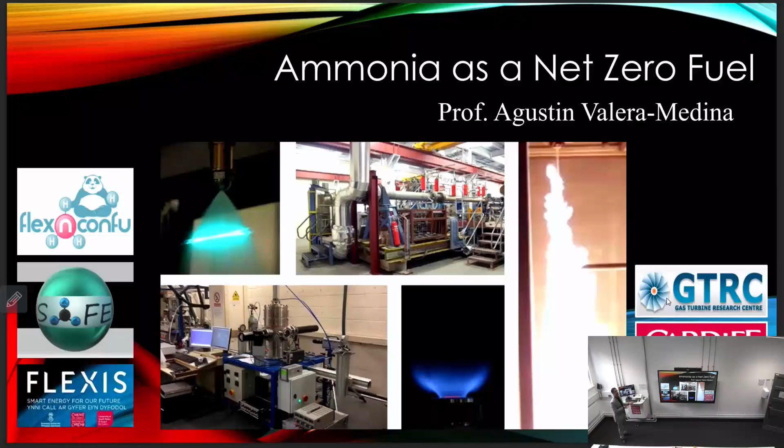So my presentation is going to be on ammonia as a net zero fuel. Probably you've seen some of these slides already, probably not. And the idea is to expand and disseminate a little bit of the work that we've been doing on ammonia and how this could be, as mentioned by Vicky, one of those net zero fuels that potentially can feed the future.

So as part of the presentation, I'll have an introduction, some of the challenges that we're facing when we're talking about the use of this chemical, developments that we have done in some areas of interest that have practical applications for the energy sector, collaborations that we've got, just a quick slide on that, and then final conclusions that we have found across all this research.

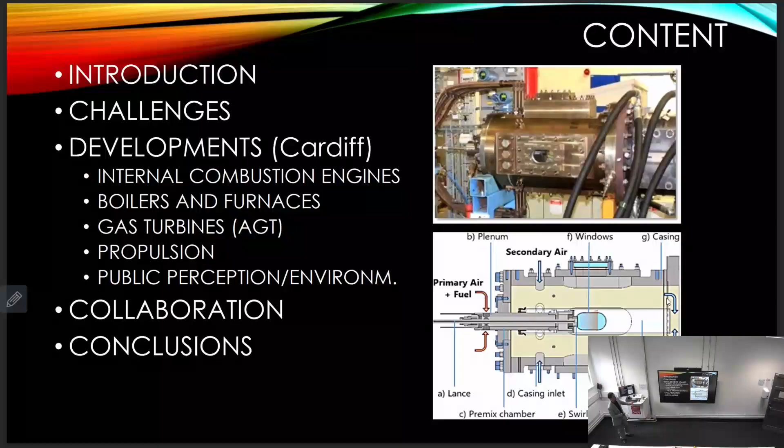So the introduction starts with this, we know it all: renewable energy that we can capture from different sources. So we've got wind that is well established, solar, and there's a lot of talk now about marine, with all the different components and systems that can allow us to recover all that massive amount of energy. What is always the problem is the intermittency that these sources face.

So we know that one day the wind is not good enough, and that can be enough to leave around 1 million people without any power. This is something that happened probably 6-7 years ago. You might remember it happened in the Midlands, where the news documented that around 40%, 50% of the UK or that region were actually running on wind power. And something happened in the North Sea wind farms, and things stopped, eventually reducing the power input into the grid. So that was a big problem.

Australia suffered a similar thing a few years ago. So this always shows that we have that intermittency factor that needs to be surpassed via other ways of storing energy. One could be batteries. We have talked about compressed gas. We have talked about many different sources. And one obviously is chemicals, chemical energy that we have learned to use for centuries, millennia, and that we're still using today.

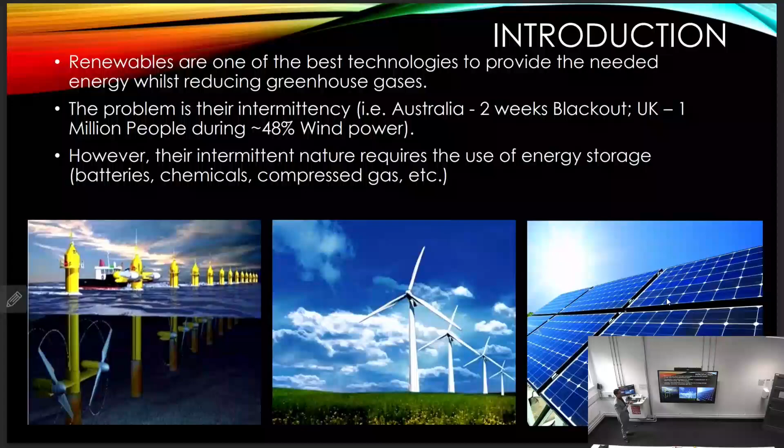It's probably going to then feed the future as we go along. So these are some of these different technologies that have been on the playground to then deliver some of that storage we're talking about. Batteries, obviously, capacitors, hydro and pumps, mechanical storage like compressed air, and some other different methods that now are in the scope of research and development for commercial applications. But one that always comes is chemicals.

So again, we have learned how to use them for over centuries. Methane, oil, coal, etc., all those kinds of chemicals that we know how to employ, and now these days talking about decarbonizing, bringing down the CO2 via net zero or low carbon vectors. And among those we have hydrogen and ammonia. That could be one of those ways as well to then deliver some of this hydrogen that is required worldwide.

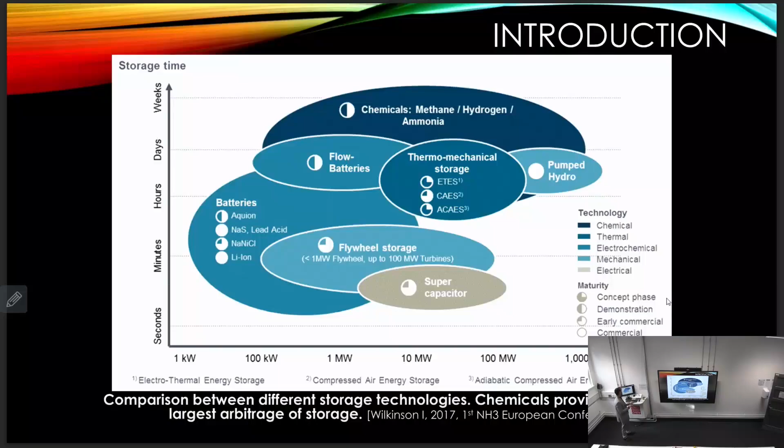This is a really nice and interesting map that I love to show in absolutely every presentation I deliver, because it's been written by the Hydrogen Council, and this goes back to probably 2.5, 3 years ago when they released it with all these different analyses looking into the different ways to distribute hydrogen. You can see here on the bottom that we have all these localized resources where natural gas is just located in very particular areas across the globe. Whereas in the case of renewable energies, photovoltaics, wind, we got absolutely every part of the planet that is essentially capable of producing some kind of renewable energy.

But the important part of the story comes when we do the analysis on the economics and the delivery of that hydrogen. So for them, the important aspect was how we're going to deliver or move around the hydrogen from, say, a location that is producing a lot of that renewable energy, for example Chile, and that being distributed to the US that is going to consume it a lot. A similar scenario would be Saudi Arabia or the Middle East going to the European Union, or, for example, Australia or New Zealand going to Japan.

So as part of that, they normalized the whole thing, did it in US dollars per kilogram hydrogen, and came up with 3 solutions to distribute that hydrogen. One ammonia, the other one liquid hydrogen, the other one liquid organic hydrogen carriers. And as you can see from the numbers, from the clean production that would happen in that heavy energy located zone to the final destination, cost at port, the numbers are similar between them. So 3.5, 4.4, 3.2, 3.8, 3.5, 4.

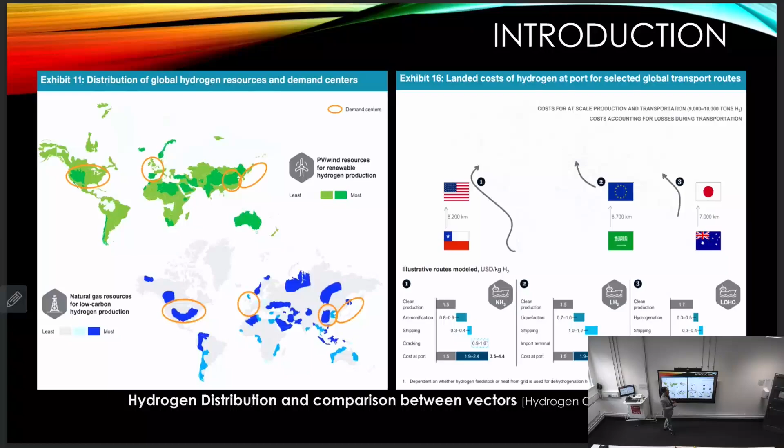Okay? But the interesting bit is that if you look into the part of ammonia, the cracking is taking around 1/3 of the total costs of the distribution of hydrogen. Meaning that if we can reduce or completely remove the cracking, this becomes the best solution, by a massive portion in the economics of distributing that hydrogen. So that's where all this research comes from, because ammonia can be used either fully as ammonia, or partially cracked into some components of hydrogen, and I'll show you some of the stuff that we've been doing along those lines, as a fuel.

And it's interesting because we can use it in that way to distribute for long distances, but it can also be used to recover stranded energy, waste streams. One of the things that is interesting as well is that because we have a molecule that we know how to use and have used for over 150 years, we can reduce the cost of actually storing and moving around that hydrogen. It's very simple. We have cylinders that contain liquid ammonia, slightly pressurized, and they can stand there for months, if not years, without major problem. Whereas in the case of hydrogen, as we start storing it for long periods of time, it becomes expensive, high pressure or cryogenic, which means sometimes 30, if not more times the cost that ammonia would cost us. It can be produced in islands or isolated locations.

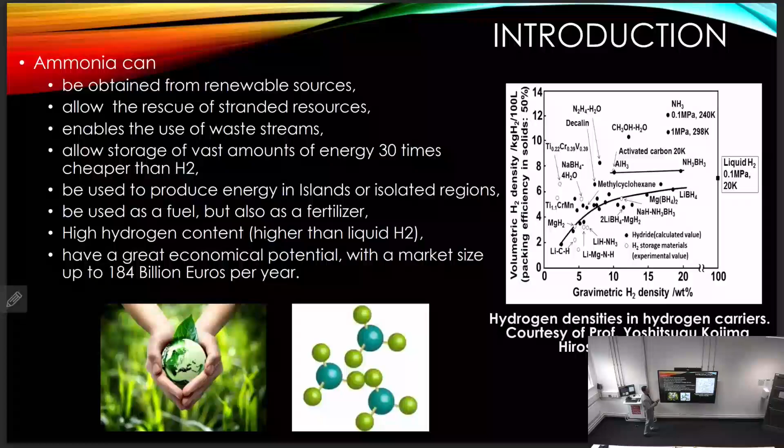It's obviously a fertilizer that we have used for that period of time, but now we're looking into it as a fuel, and it has more hydrogen than hydrogen itself. And I was like, what is going on? Well, it does, because we have in ammonia 3 atoms of hydrogen compared to 2 atoms in the hydrogen molecule. So it actually has around 27% more hydrogen than hydrogen itself. And then finally, we have a very well-developed, mature infrastructure that is moving around 200 billion euros per year just on ammonia. And that is going to expand 5 times just on the fertilizers.

So it's one of those cases that, again, just shows that there's potential. Now, one of the questions that I always get is, where are we going to get that ammonia from? We're talking about not only for fertilizing, but as a fueling vector. Well, right now we're producing around 90% of that ammonia via conventional methods, just methane reforming, lots of CO2. Actually, it accounts for around 3% of the CO2 globally.

Now, what companies producing ammonia are trying to do is move away from that and get into what is called Generation 2 ammonia production. Generation 2 ammonia uses electrolyzers fed by solar or wind systems that produce the electricity required to produce the hydrogen, which then gets mixed with the nitrogen sequestered from the atmosphere in these big reactors, Haber-Bosch systems. And that produces the ammonia that we can use for generation 2.

Problem is that they're still expensive. Electrolyzers are just too massive, and it's one of the big tolls. So ammonia produced this way is still very expensive, 3 times more expensive than the conventional way.

But then the third generation, the one that is promising, is getting rid of the Haber-Bosch process. This reactor that we have in between is going to be removed, and using fuel cells and materials that combine hydrogen and nitrogen at surface level will produce ammonia directly. So instead of having an electrolyzer producing that hydrogen, which is the expensive part of producing the ammonia, it will be only water and nitrogen that combined together will produce ammonia straight away.

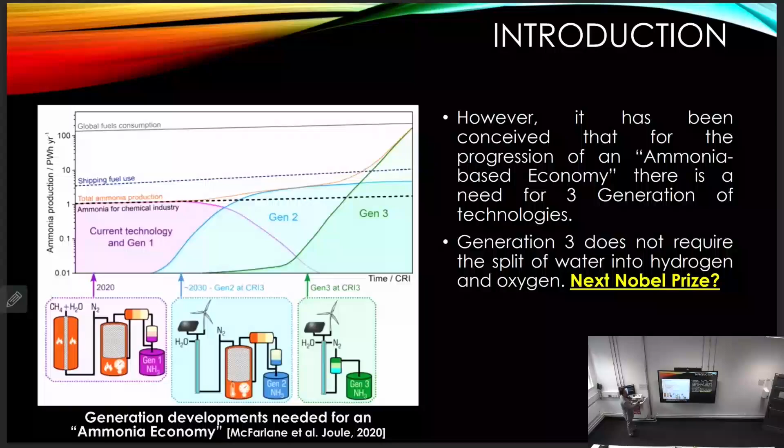Ammonia is going to be a support to that hydrogen agenda. It's not going to be the silver bullet. It will have some niche applications, and I'll mention those. And finally, if we want to store it for a long period of time, ship it, or distribute it over long distances, we go for ammonia. So it can support all these different aspects: transport, heating, cooling processes, propulsion, stationary power, etc.

Now, there are many things that we still don't know, and some of them have to do with fundamentals, reaction and combustion. Those are what we are studying here in engineering, because the reaction of nitrogen is very complex. Once we start burning it, we know some cases and conditions where we can bring down NOx emissions. But the reaction mechanism modeling that exists at the moment hasn't cracked what is going on at different pressures, conditions, flow rates, etc. That is still unresolved, in an area that has been around for probably 60 years.

So, a fascinating area. Public perception is probably going to be the most important topic in the development of these technologies, because communities perceive ammonia as a toxic chemical and its smell as a nuisance. So public perception differs in different areas. For example, in the countryside they are used to some ammonia smell, 1-2 parts per million from the manure coming from cattle, poultry, etc. Whereas in cities, they say, no way, this is not going anywhere close to me.

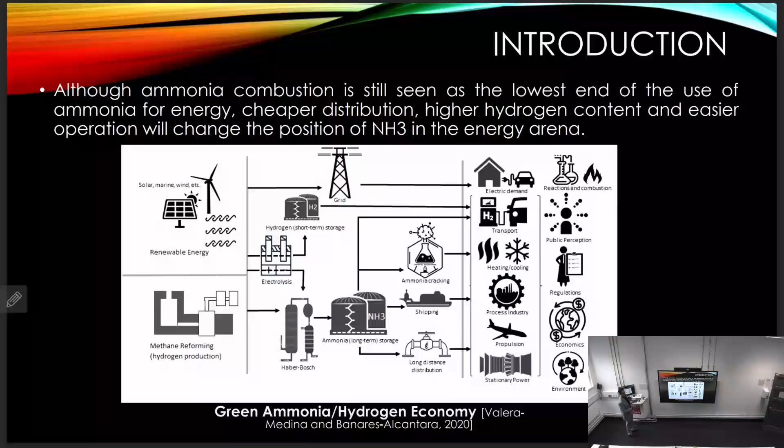So we've got ammonia that is being produced in Morocco and then consumed in the UK. How is that going to impact the nitrogen cycle? We don't know. So along those lines, ammonia presents a really nice energy density, higher than the one that we get with hydrogen, even liquid or pressurized. Compared to lithium batteries as well, it's much higher. It's not as high as the carbon-based fuels, but in some cases, for example methanol, it's close enough.

And when it comes to the long distribution cases, shipping, rail or lorries, we have as well the case that ammonia is the most cost effective. So again, there are some areas where ammonia will play its role. So it's very likely that we'll see it in shipping. The shipping industry is nowadays developing internal combustion engines, large size, again, 2-stroke, that are putting this together.

The latest news was just a week ago that MAN has finally finished, with the support from several South Korean and Japanese manufacturers, the first unit that will be put on the sea in the next month. And with that, they want to replace many others as part of their commitment to reduction of emissions in the various Asian countries.

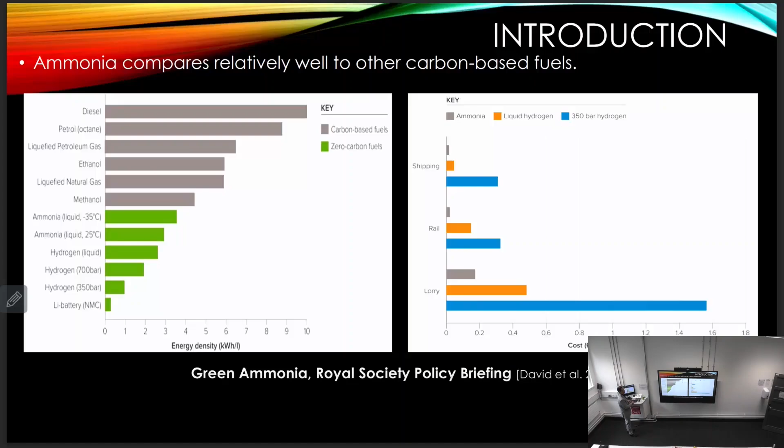Rail as well, heavy duty, large, long distances will be another area that has a lot of potential. Because again, the requirement of ammonia that you need to drive or move a train will be lower than the amount of liquid hydrogen that you would need to do that same trip. And then finally, lorries that would require heavy loads in combustion base. So when it comes to combustion, the heavy duty just plays better than the fuel cells.

A little bit of wearing from the cylinders, but nothing major, nothing that you would say is going to stop us operating. And the same way, we have the other cases, and then as carbon-free fuel comes, this is an option that is feasible.

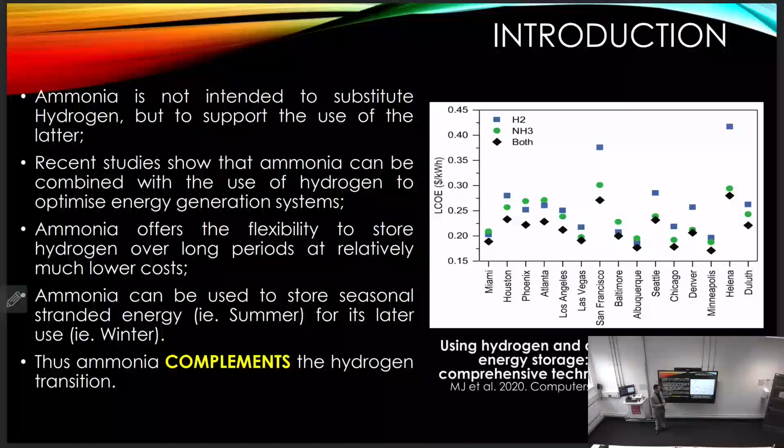And then finally, showing that the combination of both of them could complement each other: hydrogen is something that can be used straight away, can be employed for fuel cells, for civil transport or use in cities, whereas ammonia could be the seasonal storage, long distance transportation, or used for heavy duty in farming locations.

So it's got a lot of capabilities, and that's the reason why the International Energy Agency in 2018 finally gave it a ranking of being a fuel. Before then, if you look into 2017, there's nothing about ammonia. It's just like an explosive or a chemical, and it's not until 2018 that this diagram appears with power industry and shipping.

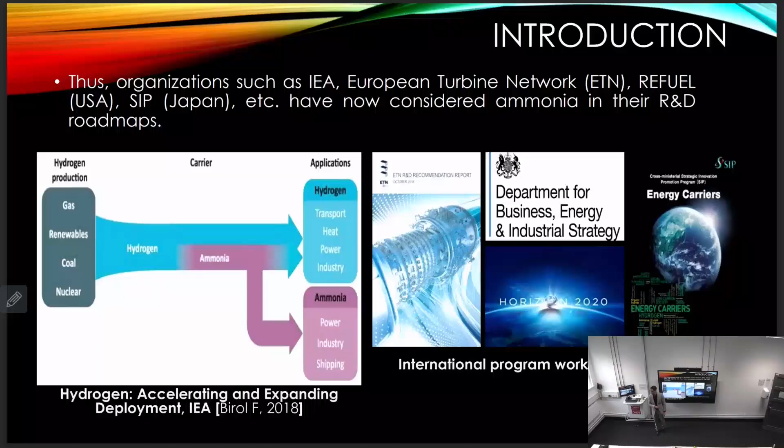And with that, many agencies across the world, especially in Japan, China, and South Korea these years, have been taking over the use of ammonia. Singapore is another very strong one, and is now looking into decarbonizing the port using a combination of both hydrogen and ammonia.

Whereas in the cases of internal combustion engines, gas turbine cycles, furnaces and boilers, we already have cases that are industrial. For internal combustion engines, we have the marine sector. In the case of gas turbines, we have Japan leading some facilities that are demonstrating as we speak, 2 megawatts, 3 megawatts power. And the most interesting at the moment is furnaces and boilers, because furnaces are now showing efficiencies between 85-90%, and we're talking about gigawatts of power.

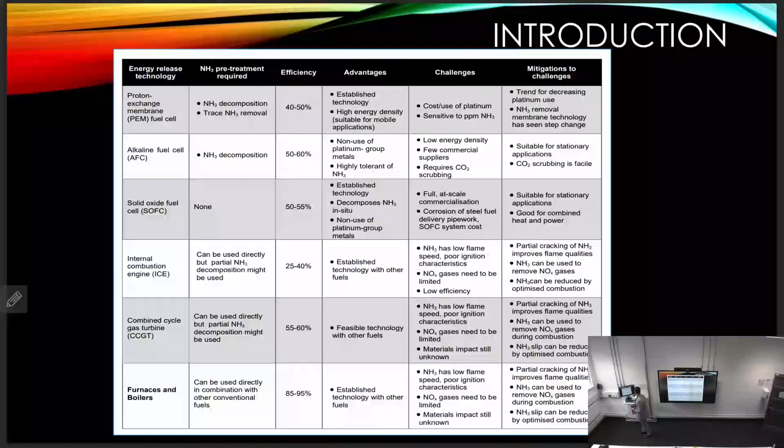So the latest developments are conducted by a company called IHI. They are in collaboration with some energy and electricity producers in Japan that are now changing up to 50% coal for ammonia. So it's co-firing ammonia and coal, and they're now using 50% ammonia. The amount of ammonia that they're employing is in the range of 500,000 tons per year just to do so.

Now, as part of the challenges, we have identified 4. First, we need carbon-free synthesis, cost reduction and efficiency. As I mentioned, the problem is that generation 2 ammonia is still too expensive, and generation 3 hasn't arrived yet. If it arrives, we never know. Power generation at utility scale needs to be stable and with low emissions. As I mentioned, we have NOx emissions produced as part of the combustion of ammonia. We are now targeting that. That's the name of the game at the moment.

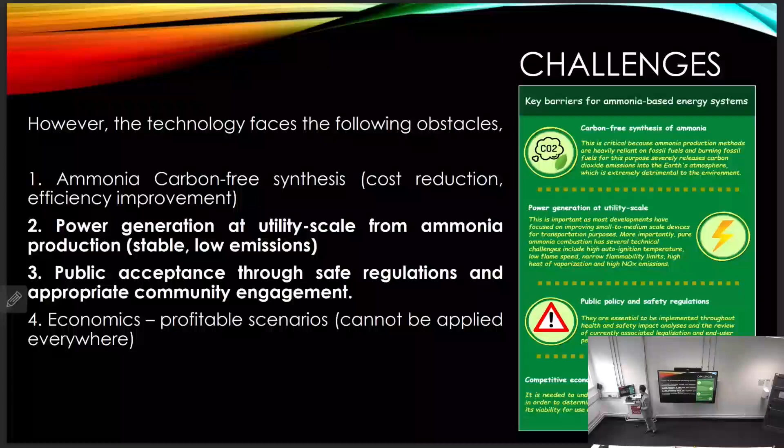Public acceptance with safe regulations, because we don't have regulations yet, and public acceptance considers ammonia as too toxic or too dangerous, and finally the economics, which need to be profitable. These are the 4 challenges that we need to surpass before we get ammonia running.

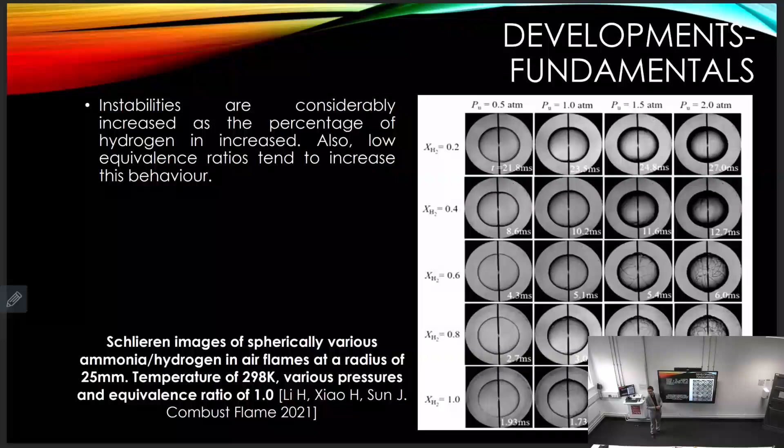So cases where we have barely any hydrogen, 20% up to 40%, are actually stable. They allow us to play well. But once we have passed that point, the hydrogen takes over, and it becomes extremely unstable. So what would be the best blend to use in these systems that allows the ammonia to be burned, but combined with hydrogen that we can obtain from the same ammonia to stabilize the flame? That is some of the research we've been doing. These are the kind of flames you will see, and it shows how different they are.

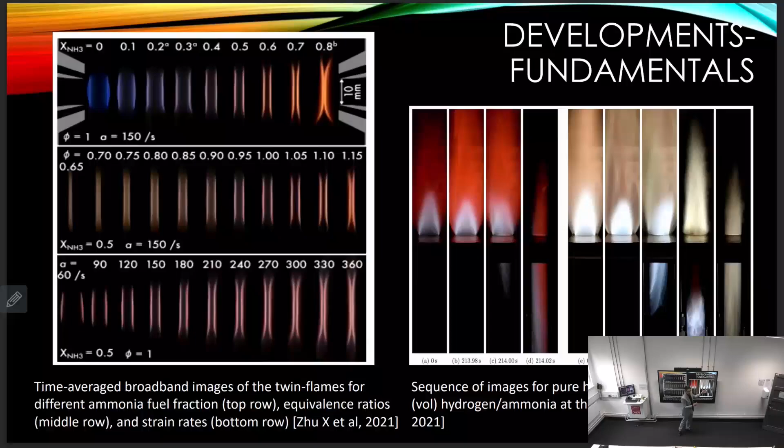This is a case where we have natural gas, again, a nice blue flame like the ones that we've got in stoves, and this one, an orange flame that is purely ammonia. So it's just the changes in radical formation in chemistry that are happening with, again, combinations of the stability of the flame, one that is hydrogen that is very fast moving into our system, flashing back, whereas the other one is just taking its time, much longer to do so. But at the same time, it's more prone to be blown off.

So this is some of the research that has been going on that has to do with liquid injection. Most of the developments at the moment have been relying on vapor ammonia because it's simple. We can use waste heat to produce the vapor and in that way improve the combustion. But one of the ideas and best ways to use ammonia in, for example, internal combustion engines, is to spray it into the cylinder, similar to diesel or gasoline or anything that is liquid. That way we can improve the process overall.

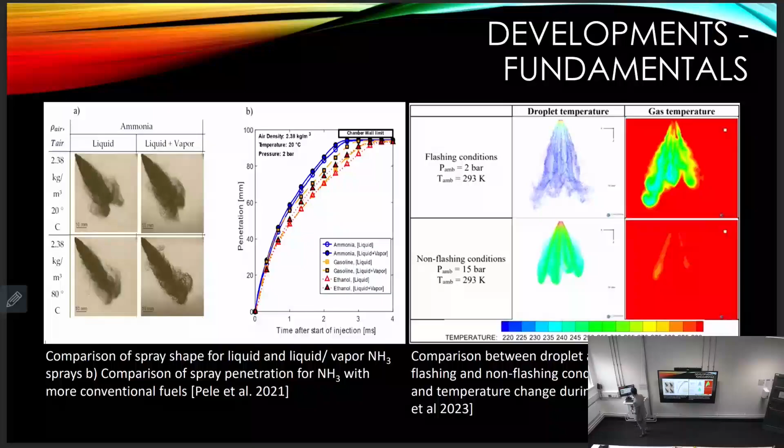And that is an area that is really interesting because ammonia, as it gets hot, will start flashing and vaporizing and producing different patterns that are difficult to determine. Similarly, once we start pressurizing it, things change, and these curves, penetration and how we get the fuel in, just start changing. So again, lots of things to be learned. This is an area that has probably only been showing up in the literature for 2.5 years, but it's still growing with modeling and implementations.

This is a layout done by the AIST Institute, one of the research institutes in Japan that has been leading this ammonia agenda. And you can see that eventually they had an evaporator that would feed combustors, and now they're looking into the use of liquid ammonia to directly feed into these systems.

Now, with that comes a lot of challenges, and things that we're trying to learn, on how we will produce onboard ammonia. It will produce NOx emissions. That is the main emission produced when we are burning the ammonia molecule, because it's got nitrogen in it, and then we need to reduce that in a way that is not polluting. If we get to a point of producing a lot of N2O, N2O is 300 times worse than CO2 in terms of climate change. The global warming potential is 300 times larger, and that means that just some parts per million of N2O would be enough to throw out the window the reduction of CO2. That's why this is a major challenge, especially when it comes to these liquid injection systems.

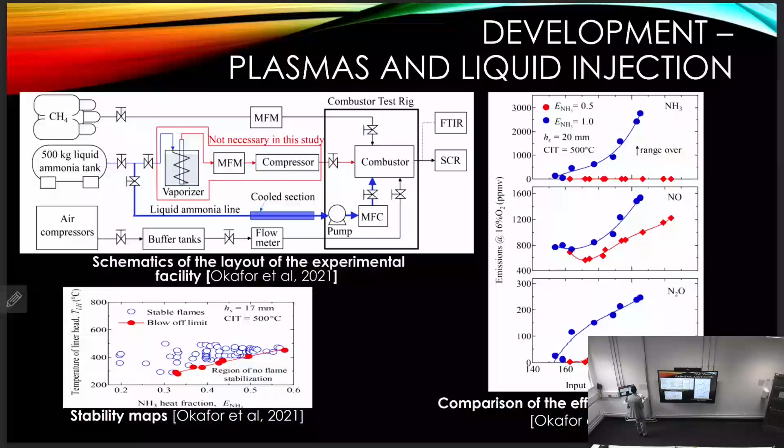Another interesting area that just blows up the imagination is the use of plasmas. Plasmas that have been used for ignition or for other purposes in physics are now also on the target to use ammonia in an efficient way. So what is the process? We have a very intensive energy field produced by these plasmas that will start producing radicals that can start interacting before they get oxidized. That means that we can potentially bring down the emissions and also improve the flame as it is. So, laws of physics.

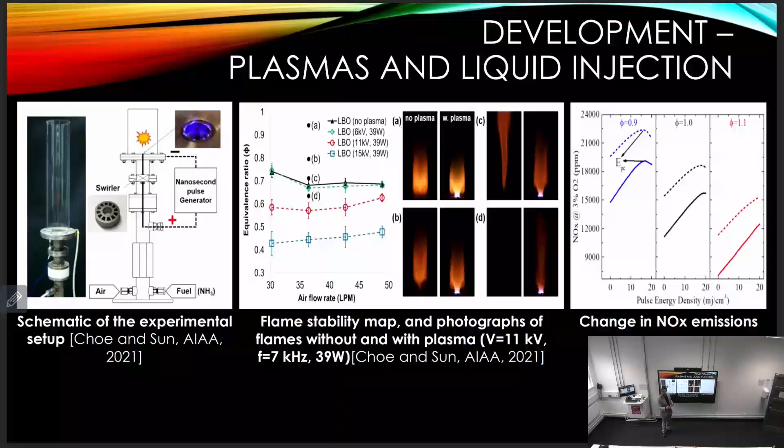For example, I read for the first time a paper that had to do with magnetic fields: how magnetic fields are trying to change the ammonia flame, and by making it more concave, increase its stability and reduce emissions. So things like that are what people are trying, using more creativity and combining different fields.

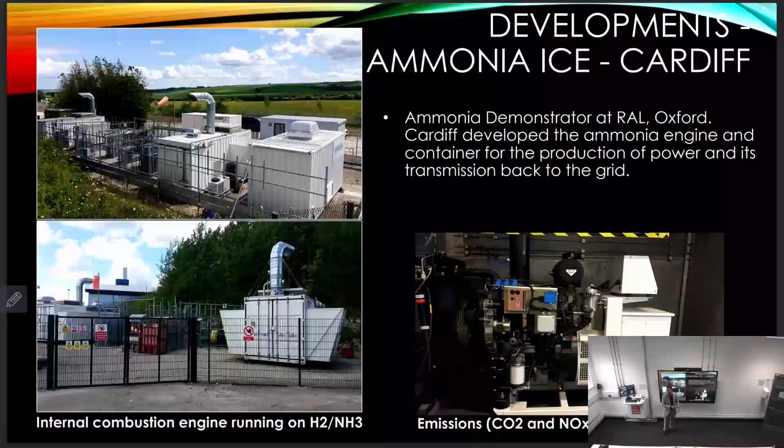Some of the work that we have done in internal combustion engines has to do with a unit that we got at STFC, next to Oxford. This was a very interesting project because we had a wind turbine operating around here, an air separation unit in this container developed by Siemens, then an ammonia producing device designed by Oxford, a storage facility, and finally a container with an engine that we developed. With that, we demonstrated the whole process of capturing wind energy, passing it through all the processes, and finally generating energy back into the grid. So that's how we started with internal combustion engines, and with that, we have looked into some of the work that is going on.

So with that, in the cases of transportation in Korea, they have taken a lot of work in the same way that Japan, and now things are happening in Canada with fuel cells. In the shipping world it is more concise. There are more things going on at larger scale. We're talking about 2-stroke large engines, and they are now promised to be in commercial applications by 2025. So we're not that far away. We're just a year away from getting to that point.

And then finally, for farming, because again, being a fertilizer, it could be one of those cases of receiving the ammonia, and then once we've got it, depending on the season, use it as a fertilizer or as a fuel. That's one of the concepts that, for example, in the US they are looking at, because they have a pipeline that feeds directly into gas stations. So these gas stations receive the ammonia directly. Farmers pump the ammonia into their nurse tanks, and then once they've got it, they use it to plough the field, which is something that's really interesting.

But in the same way, they could use it and plug into the truck, and that way feed it to use it and move it. So it can be used again without any problem, alternating between a fuel or a fertilizer.

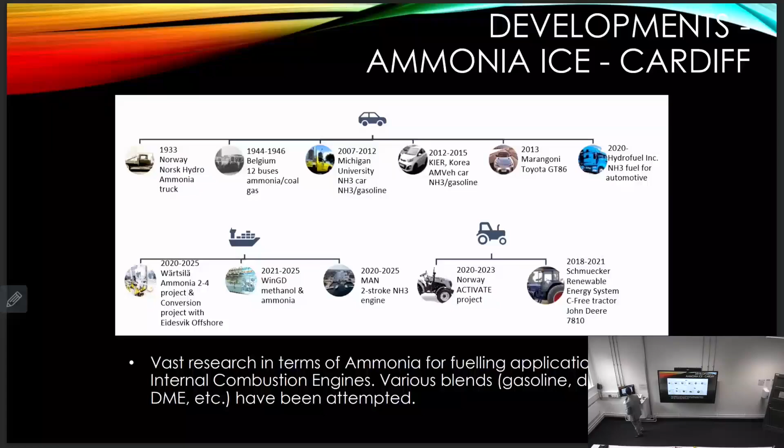As part of this program, some of the studies that we have done have to do with using the ammonia for shipping and long distance or large distribution, and with that a concept of a city gate terminal, similar to what we have with high voltage electrics, would allow the ammonia to be received, and from that point either crack it and produce hydrogen for the cities, or use it as ammonia in rural locations, where, as I mentioned, it can be used for heavy-duty trucks, stationary backup power, heat, cooling, or even stationary large power generation.

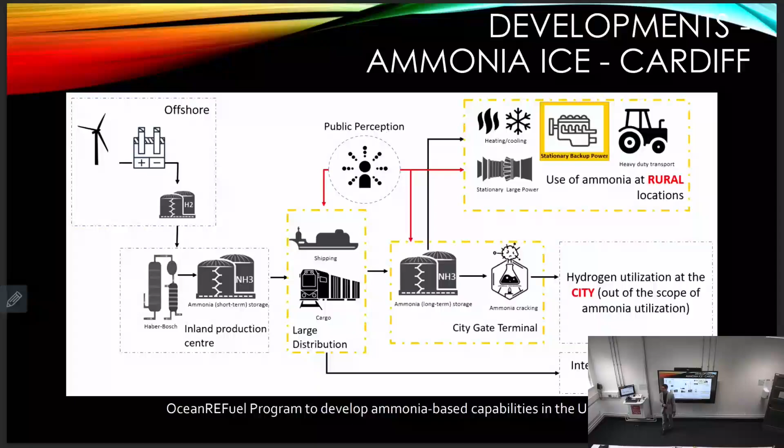Because again, most of these large power generation systems do have ammonia facilities for deNOxing. So they know already how to handle the ammonia. So it's not an unknown for them, it's something that is a given. So if they can replace it, this would be a way forward to decarbonize relatively easily.

These are some of the cases when it comes to internal combustion engines, with all the complexities that we have to sort out when we start mixing with the different vectors. So we have natural gas, syngases, gasoline, DME, diesel, etc. And as you can see from this table, we have cases where, with onboard ammonia, the NOx increases or decreases. We have hydrogen that sometimes shows up, hydrocarbons as well in the same scenario. So this just shows how complex the scenario is.

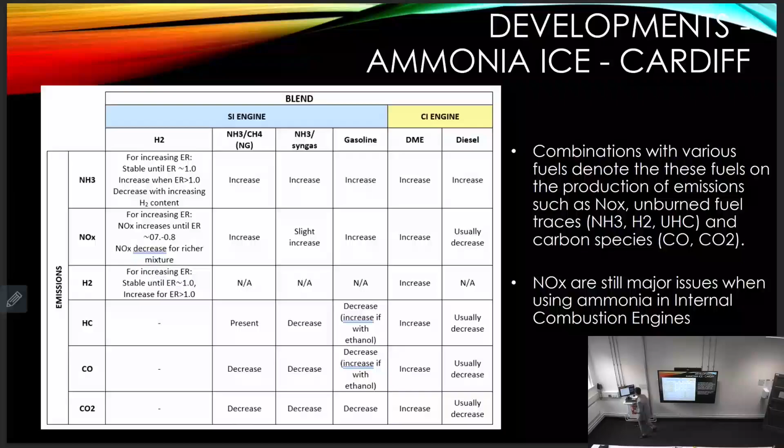And many companies, many institutions working together with industrial ventures are looking into very specific cases to try and decarbonize some of these using ammonia. Again, the challenge is that they are so variant, so different, that once the ammonia starts mixing with some other molecule, it starts producing very different patterns. So that's where the research is. And again, this gives us a lot of opportunities to do a lot of work in the institutions.

Fluidized beds, the same way that we have for biomass, can be employed for ammonia as well. And these are works done by South Korea, where they're looking into the use of these types of systems to better produce energy and use some of the waste that they're already producing in locations, again, like farms where they have some ammonia available.

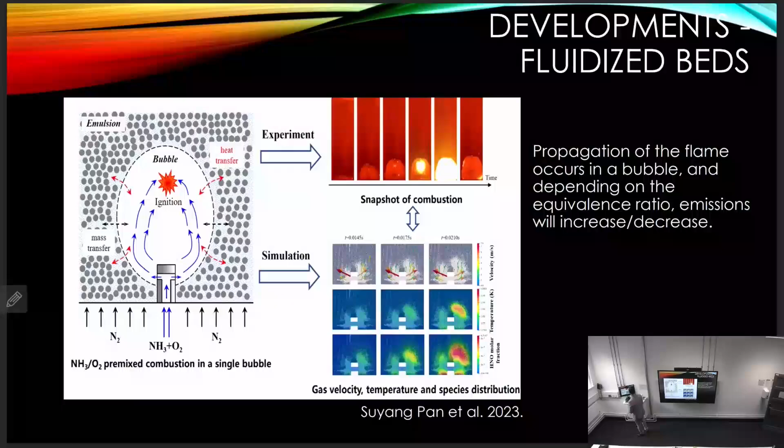Boilers and furnaces, as I mentioned, is a very interesting one, because we have cases that are already on the industrial scale. We have systems that have been developed for refineries or oil locations where they produce a lot of ammonia as well. We have the case of steelworks, where they are now trying in Japan the use of ammonia for furnaces. So as you can see, the difference between the natural gas and the ammonia flame, the bluish one and the orange one. And one very successful case that the Chinese are bragging about, that's really interesting, is in Guangzhou.

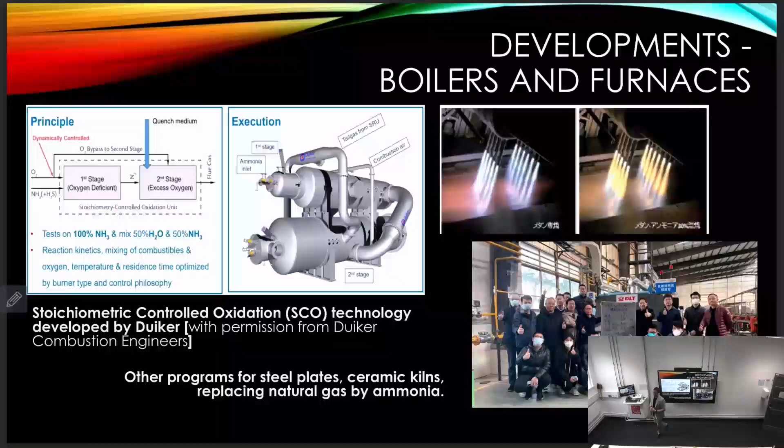And this is for the tiles industry. So now they have a line that is 200 meters long, replaced entirely with ammonia burners, that is producing tiles that are zero carbon and apparently with better properties than the ones they had with natural gas. Interestingly, in this particular project, the whole idea of having this system was that at that location there are 300 companies producing tiles for the global market. And they're pushing to remove the natural gas using ammonia, because they have already demonstrated that it's feasible and they can do it.

For us, an interesting area is the replacement of LPG, because we have a lot of communities across the UK and Europe that are right now using LPG. They don't have any connection to the natural gas grid. They have poor connection to the electrical grid. So if we think about electrification, it's going to be too expensive.

Or if we think about having this promised hydrogen line, it's never going to happen, or at least not in the next 10 years. So that's the reason why until now they still operate using LPG. And this goes as well for some farms that do processes, distilleries, poultries, etc., just for heating applications. So doing some techno-economic analysis, we found out that bringing the ammonia would be the most economic, feasible solution compared to even liquid hydrogen.

And I always get asked why, if you are producing the ammonia from the hydrogen, it is more expensive. Well, the main reason is that you will require more nursing tanks to deliver the same amount of energy with hydrogen than you would require with the ammonia. So again, for these particular conditions, it will be better to bring the ammonia because it will be more energy dense. Similarly, some of the components already used in LPG can be used straight away with ammonia, because most of them are made out of stainless steel.

The evaporators, stainless steel. The storage temperature for LPG is minus 42 centigrade, and the one for ammonia is minus 33, so very close. And the properties are very, very suitable for most of the components. So that's the reason why right now we are developing a 1.52 megawatt power unit boiler with a company called Flogas.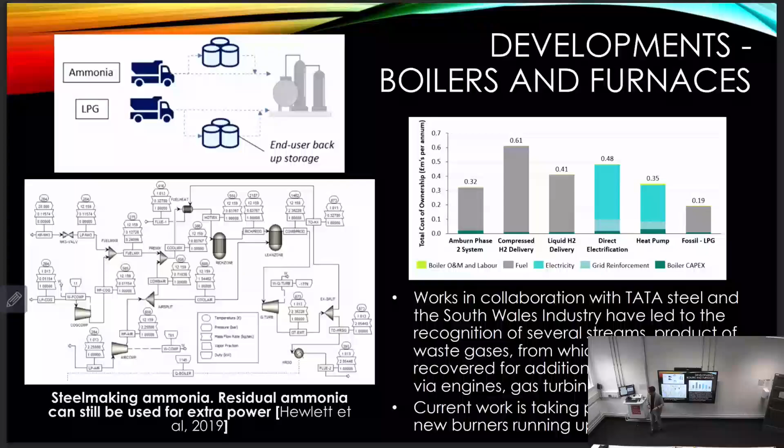On similar thoughts, we were exploring with Tata Steel the use of some of the ammonia that they produce in Port Talbot. It's around a ton that they produce per hour, so it's a massive thing when they are operating producing coal gas, and that could produce over 5 megawatts of additional power just using this concept. Again, things that can be evaluated and explored further in other projects.

This is the kind of development that IHI, this company I was talking about, has been doing with co-firing pulverized coal with ammonia, with lots of engineering aspects, beautiful analysis on different nozzles, and depending on the nozzle, they would have more or less NOx emissions. Again, things that have to do with the flame itself and the fundamentals of the combustion of these two different chemicals. So you have particles that will start producing energy, but at the same time will produce radiation, consume radiation, etc., that will then change the patterns of the final system.

Right now, the dream is to get to 100% ammonia in some of these systems, but the target up to 2025 is 50% replacement. They have managed to do that with around 500,000 tons of ammonia being shipped into a place in Japan, close to Tokyo, that is now powered using ammonia. Similarly, IHI is already selling these burners to Malaysia, India, Singapore, and now South Koreans and Chinese are replicating.

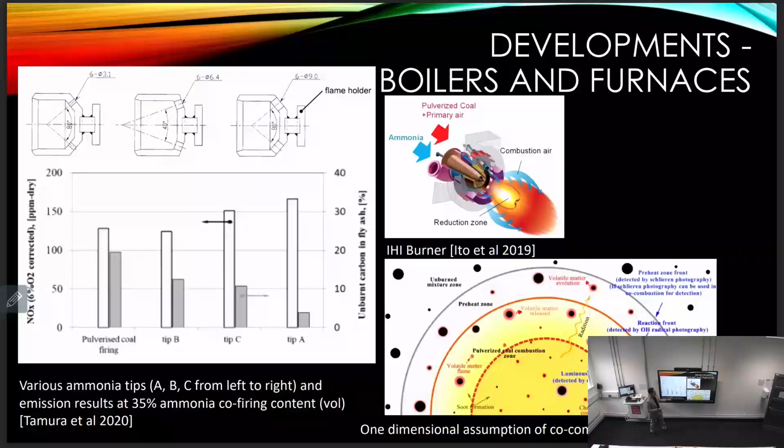So in this area, co-firing is probably the way to go, because at the temperature range where ammonia is burned, since they're not that high, they actually deNOx some of the system. One of the things they found is that once they burn 50% coal, 50% ammonia, NOx emissions are lower than burning pure coal. And at the same time, because of the radiation being produced, they increase the efficiency of the system. So right now, 50% ammonia, 50% coal is the best way of operating these furnaces. The main problem right now is the cost of the ammonia, which is still too expensive to be used.

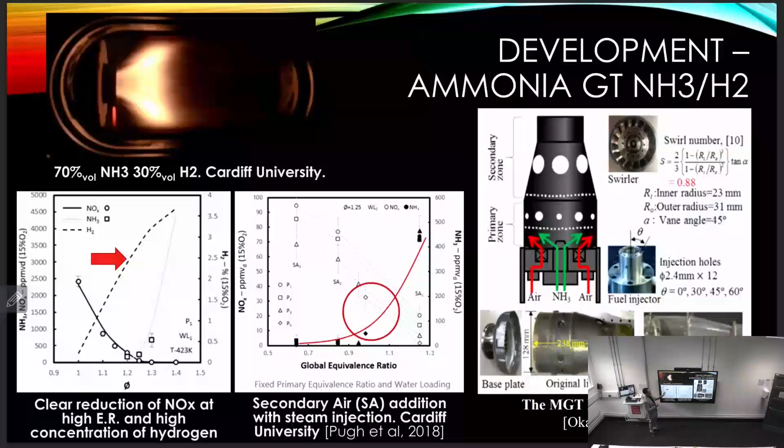In the area of gas turbines, these are some of the tests that we have done in our facilities, and they show different trends. Depending on the system, you will have reduced oxygen in some of them, then increased oxygen, and that will bring down the NOx emissions, the nasty pollutant that we get when burning ammonia. That has been very revealing, because as we have progressed through the research, similarly and independently, Japanese and South Korean universities are finding similar trends, which again gives us confidence in what we have been doing.

That has given us potential to then design, patent this burner, and the idea is to combine different aspects of the recombination of these radicals, these species that happen across the flame, and then bring down NOx emissions to almost 0 parts per million. Now we have some unburned ammonia, but that's what we are working on now. So we can then recombine them with different parts of the flame and then finally produce as low NOx emissions as possible in this type of systems.

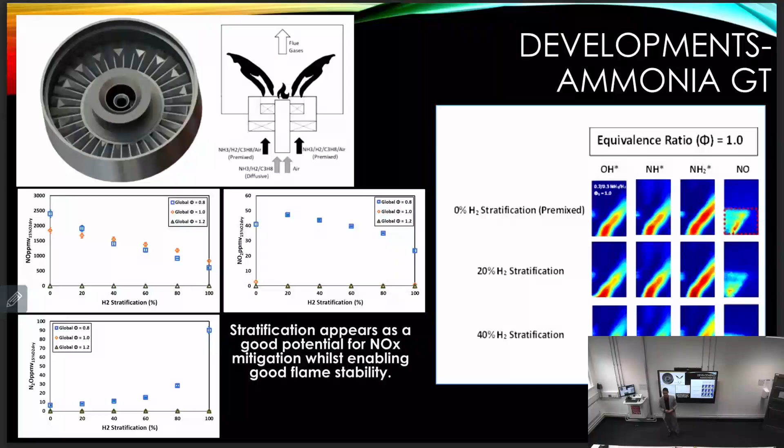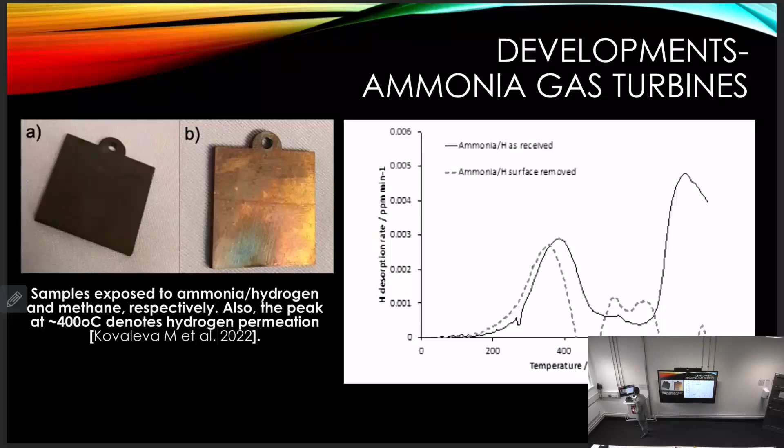And another problem has been all this hydrogen embrittlement that is just showing up in these at different layers. So that is something that we don't understand. Nobody understands it because it's an area that just probably started a year and a half ago in the literature. Nothing much, apart from some tests in the 60s that didn't give much information. This is an active area that has a lot of potential.

At a larger scale, we've been working, similar to other institutions, with companies like EDP to produce power in a place like Portugal, with concepts like this one, where you can operate a gas turbine, and then the gas turbine, once that is on off-peak power, will keep operating at that same power level to then produce ammonia. So get enough power to the electrolyzer, then produce the hydrogen, then get the ammonia synthesis. So once we are back into peak consumption, we can then release that ammonia or crack it, producing hydrogen, nitrogen, and then feed into the unit.

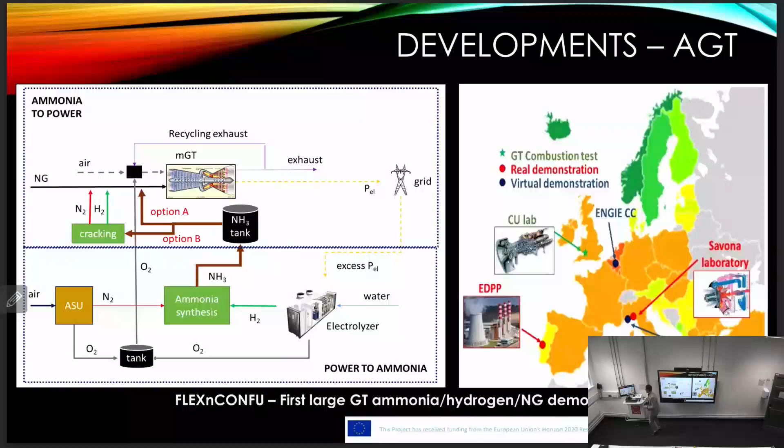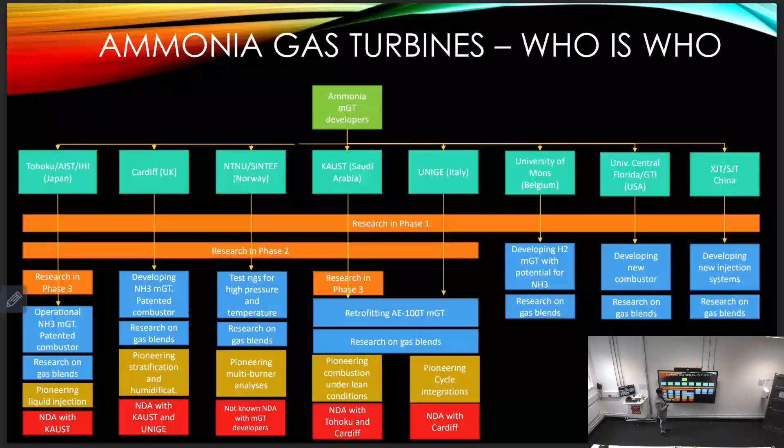With that, then we do calculations and analysis on the size, the storage capacity, and all that for this power unit. That's something that is ongoing, with interesting results that we got now from that research. So these are the kind of turbine players that we know about, with Japan, with us, with Norway, Saudi Arabia as well, Italians already working in some of these analyses, universities in Belgium, the US, and also China doing their own contributions. As you can imagine, the US is picking up very fast because of the investment that they got. So they're moving into research phase 2, where they are now demonstrating combustors at a medium to large scale, and then phase 3 where they are implementing everything into these units.

Propulsion is another interesting area, and this one goes back to the 60s, 70s, where that unit, the X-15 rocket, managed to get up to Mach 7. At the time, nothing was faster than that, and it was until the shuttle was launched that this one lost its record. But it was based on ammonia and liquid oxygen. And then with that came a lot of developments, especially for satellites, where they still use it for propulsion systems, because again, it's very easy to store, and allows for the correction of an alignment of satellites.

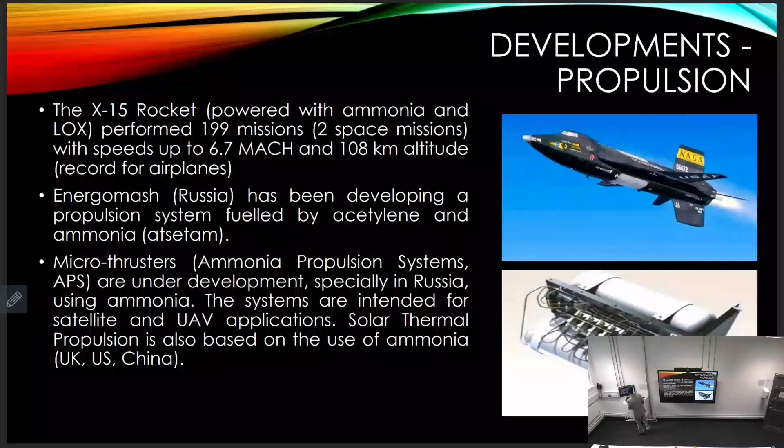One interesting thing is people talking about this as a potential fuel for aerospace applications. And again, we go back to the case of liquid hydrogen. So in the case of having an airplane with a 78.5 cubic meter tank, we would be able to fly a long distance, 100%. That's our norm. If we wanted to use liquid biomethane, that would be reduced to 68%. If we wanted to use liquid ammonia, that would go down to 39%, based on the amount of energy that we would get from that system. And finally, if it was liquid hydrogen, it would be 29%. So it's showing how feasible and more dense ammonia could be as an option.

And there are already developments going on in terms of liquid ammonia propulsion. So one of the things that comes back and is haunting us in terms of the use of liquid ammonia for aerospace is the public perception.

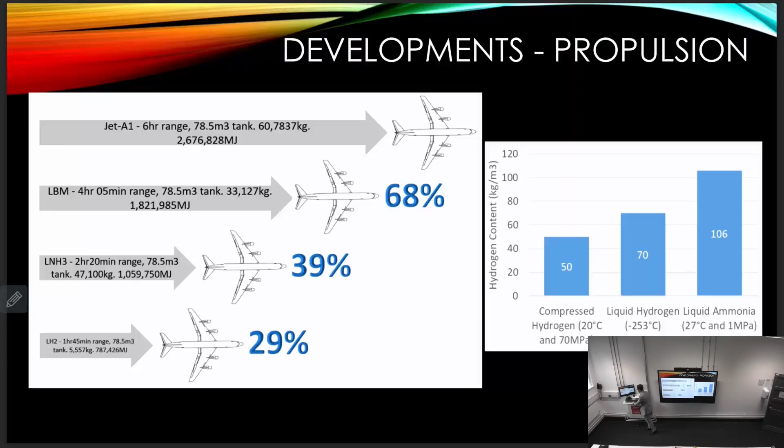Public perception on how ammonia would be distributed, what would happen if there's an accident, and what if, for example, some of this ammonia is released in the middle of the ocean. Now, those kind of questions are the ones that we need to surpass, again with public perception and then working with these companies. But as you can see from all these thermodynamic analyses done by Germany, they managed to get some of these sorted out, at least recognize quantitatively what will be their impact.

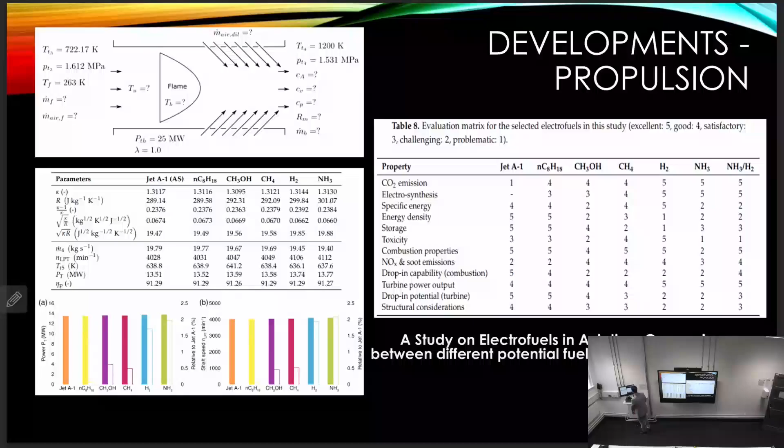And in terms of, for example, comparison with jet fuel and some other vectors, methanol, methane, hydrogen, ammonia or ammonia hydrogen, the ammonia hydrogen came back very positively in most of these aspects, again with a 5 with CO2 emissions, electrosynthesis, etc. The ones that came out as the poorest were obviously the toxicity, that again just involves what is going on with ammonia. But as I said, this is a chemical that we already have in Heathrow, and a 10 megawatt refrigeration unit is operating on it. Now, the difference is that it's not as a fuel, so that changes everything, and the regulations will have to change.

So with that, some companies in the unmanned vehicles area, or even thinking about propulsion, companies like Reaction Engines that have been looking into different options, are now considering the use of ammonia. Now, not directly, because we don't know how that is going to play its part when we're talking about high altitude combustion, but as a method to distribute the hydrogen. That could be the beginning, but eventually it could be one of those ways that without having any cleaning of the gases coming out of that process, we can then do it directly.

Then we go into the public perception, that aspect that is haunting us and that is not allowing us to do more. And it has its own valid reasons, but at the same time, I'm going to show you some of the aspects that come with the use of ammonia. Recently, the Environmental Defence Fund published this study where they were analyzing oil spill impacts compared to ammonia impacts. And they characterized cases for bacteria, plankton, macrophytes, invertebrates, reptiles, fish, birds, and mammals. And as you can see from all the points, they're almost the same. The ones that change are essentially invertebrates.

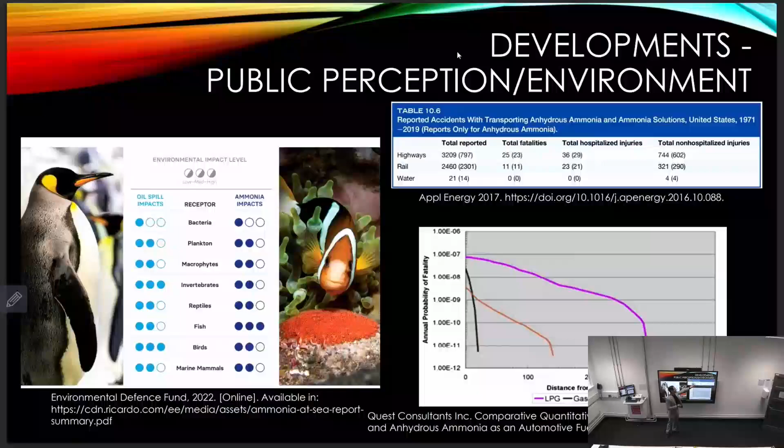Now this goes in the US. So in Europe, it's a similar story. We got around 50 over a period of 50 years, whereas in other economies like India, Malaysia, South Asian countries, Africa, etc., that number is much, much higher because nurse tanks have accidents, they release all the ammonia and then kill even communities to the extent of 150, 200 people in a go. So it is regulations, but we need to then use ammonia as a fuel that can decarbonize.

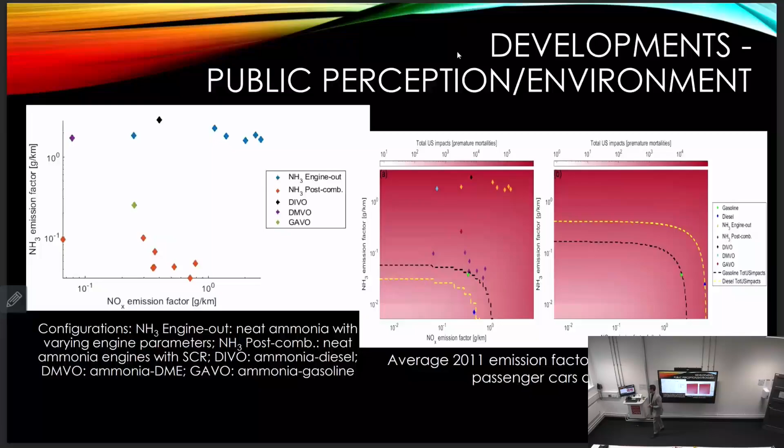These are some other studies that we are finishing on premature deaths when it comes to the use of engines that could operate on either diesel or ammonia. And here you can see that in the case of ammonia, when it has aftertreatment of gases, it just brings down those numbers to extremely low, much lower than the ones that you would expect from diesel engines. So again, it's one of those cases that shows that ammonia under the right conditions and the right system could be even better than the ones that we're already using. It's again that public perception that is still stopping it.

This is a final study, and I think it's the last slide that I got, that shows what is the perception from different economies to ammonia. And it shows that in the case, for example, of the UK and Mexico, there are a lot of differences, but the main ones are related to these two aspects: that it is poison, and the smelly nuisance that ammonia can produce. You can imagine in the case of the UK, regulations are strict, and the main problem is actually it being a nuisance that is going to be smelly. Whereas in the case of Mexico, it's going to kill us. And again, it goes back to having regulations that are up to the task to reduce any exposure or any toxicity that can actually kill an entire community or anyone that is operating with that.

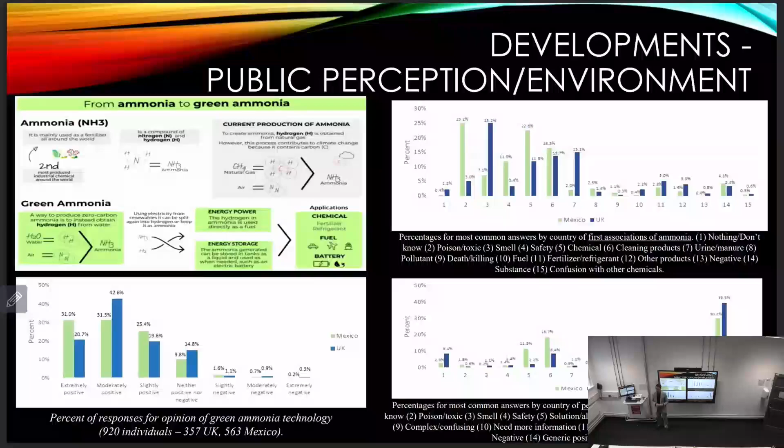So once this was analyzed, once some infographics were shown to the people working on these workshops, it was clear that they changed their perspective, they understood much better, and they realized ammonia could have a lot of potential to decarbonize, as long as it's well regulated. But this is something that needs to be done.

That's because there's not been a lot of push on the improvement of some of these materials. Now, what people are looking at is methods to carry ammonia in a more efficient, less toxic way. That is something that is important. Not the ammonia storage itself as a liquid, because it's already highly efficient, but how to move it in a safe way. And with that, many of these materials are playing an interesting part.

So research is going on in material science and catalysis; they are looking into honeycombs, into porous materials. Magnesium seems to be a really nice player, where people are looking into combinations between boron and lithium to produce pellets and designs that will maximize that. So if there's a sudden release, the ammonia won't be leaking out; it will stay inside the material. They can get it out using some thermal applications. So that's where the research is at the moment. There's a lot going on.

Yeah, well, that's what we're working on. The developments that we have done, and similarly some of the developments that other companies and institutions are doing at the moment, have to do with fundamental research on interesting physics, plasmas, magnetics. In our case, what we're using is stratified combustion to bring down the NOx. In this particular case, we were operating at 20 kilowatts and we don't have any NOx.

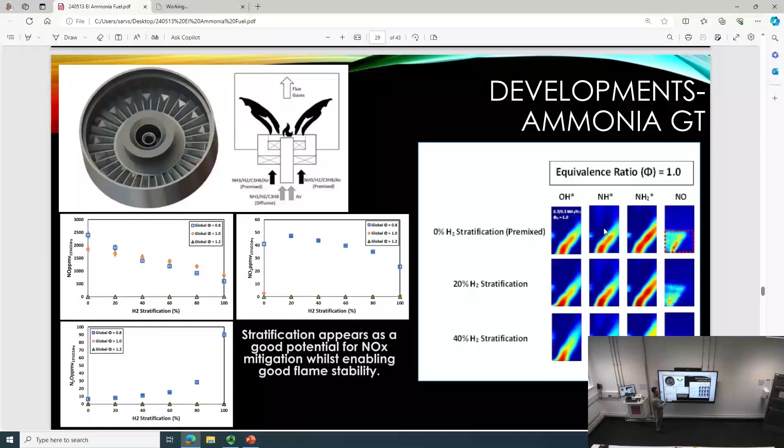Now we still have some slip ammonia. And the idea is that we can sequester the slip ammonia by condensing all the water that we're producing. It's around 35%. So we can bring that down by an order of magnitude. So these systems can be very clean. Now, this works at 20 kilowatts, that's great. Is it going to work at 1 megawatt? That's what we need to find out.

Similarly, in the case of the large-scale gigawatt furnaces that Japan has been developing, they are producing less NOx emissions than coal, and the research is trying to bring them down even further. One of the interesting things about ammonia is that it's used in power plants for deNOxing. So the same ammonia can deNOx the NOx produced by burning ammonia, which is what people are looking at. That's what combustion research is all about these days.

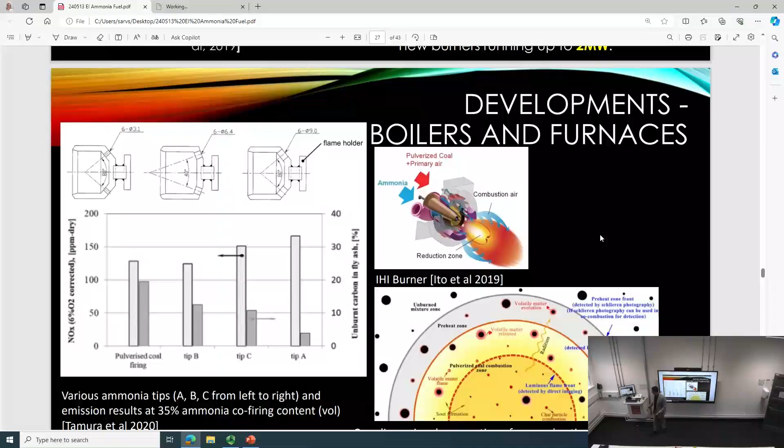You had a graph fairly early on which showed the levelized cost of energy of ammonia versus hydrogen in different countries, and then a combination of both. Yeah, there it is. So two questions. When you say both, is that using hydrogen and ammonia separately, or is it a blend? Blend. Okay. It is more like a blend.

What they were studying was all these different locations in the US, and depending on where they were located, it would be a hydrogen-based city or an ammonia-based city. If it was close to the sea, it would probably be more hydrogen. If it was closer to a port that would provide the ammonia, it would be ammonia.

But then once they combined both, they found out that the levelized cost of electricity was the lowest. And it was because instead of thinking, let's have a big hydrogen producing system to then feed all the grid, or have a big ammonia facility just storing all that energy, we'll have a smaller hydrogen system with a smaller ammonia storage facility. And that brought down capex in all the cases.

Thank you. Yeah, that answered my second question as well. So that's great. Sorry, I'll just continue this question, because I think the US electricity market is quite unique because you use location-based pricing, which doesn't exist in most countries across the world. So I wonder how indicative it can be if we use that as evidence to support our decisions.

That's again one of the things that I think is a really good point and that needs to be done. So part of the research that we're trying to do is trying to find out the different levelized costs of electricity and levelized costs of hydrogen, so we know what would be the difference between scenarios. So one that we have done recently that's really interesting is on Milford Haven. So how would that be different to the LNG that they're already exporting into the grid?

Yes. Thank you for a very informative and data-rich presentation. My question is about the outputs of all this research in terms of infrastructure, and how you see ammonia playing in the hydrogen renewable energy economy in the future, particularly as far as that applies to the UK. You mentioned some forms of transport, like heavy shipping, rail and so on. Does that imply that you're going to look at storage around ports and so on?

Yes, totally. The way that we've seen it, this is an idea that is being expanded nicely, and we have some infographics that we're just about to release, to have hydrogen production sites that potentially can use the ammonia storage concept. Once we have that, it's going to be distributed to two different locations. One will be through shipping and cargo, the city gate terminals, and that could be a port, could be outside of a city, could be on the outskirts of a large farming community, etc.

And then it will be directed as ammonia directly, that can be used for fueling and fertilizing purposes, the way that, for example, the US is doing already. They have a long pipeline crossing the country, finally reaching these petrol stations where they fill in the ammonia. Are we going to do it in the same way? Probably not, because of our regulations. It could be something that is automated. Now the farmers are doing it directly; it could be something that is just done by automation.

In the case of the cities, I don't see the ammonia going in, because of this reluctance of people saying it's no way forward. It will require cracking to deliver the hydrogen into the natural gas grid, starting with the 20% that we know we can reach, and eventually phasing in with the increase of hydrogen-prepared pipelines. So the ammonia will be a supporter to that hydrogen. We need some additional hydrogen for the gas grid because we are running out.

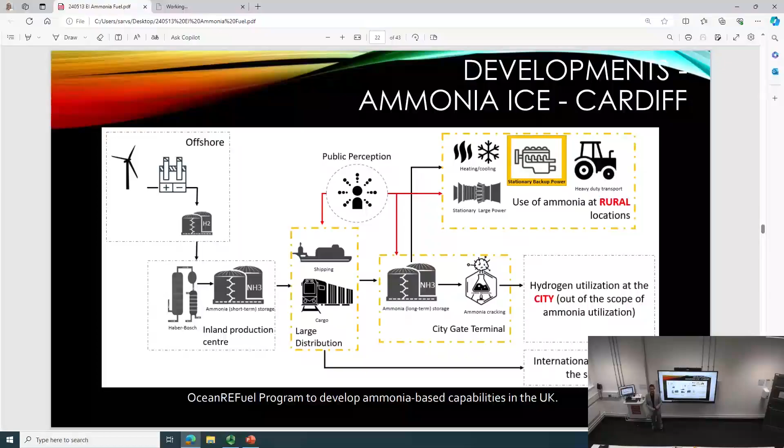Oh, sorry, one last question on the third generation technology. You mentioned something about fuel cells early on. Are you saying that you're looking at proton exchange technologies but not electrolysis? Yes, exactly. It's proton exchange. The way that I understand it is that you have the proton from the water molecule, the H+, being moved through the membranes. Once it reaches the nitrogen that has been captured, they use lithium recombination: the lithium captures the nitrogen with the hydrogen, and they get together to produce the ammonia, releasing the lithium back into the membrane to restart the cycle.

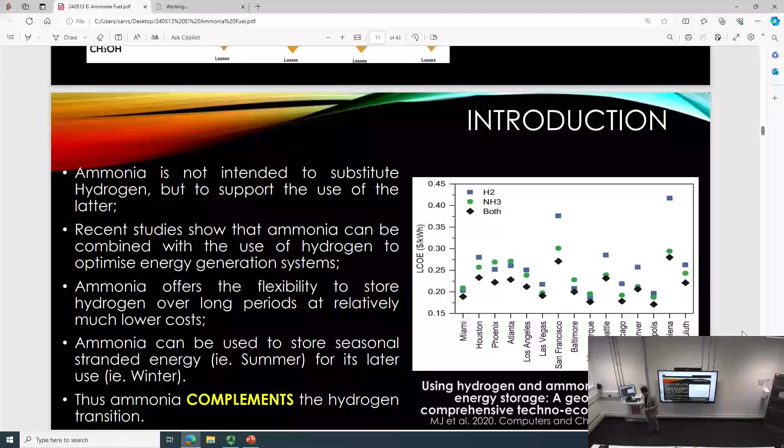So what are your feedstocks for that? Water and air. Yeah. There's a company in Australia that has been working on that. I didn't add it to this one, I should have. It has been showing efficiencies around 46% with really nice results. The company is called Jupiter Ionics, a venture supported by Monash University. Really nice stuff. Similarly, the US and some in Europe are trying to go in the same area, using lithium as the basis of the process. There's another one that I didn't mention, the use of thorium reactors. That's a really interesting, mind-blowing type of concept.

So there are companies across now all different continents that are trying to create these small reactors, the size of this void that we have between tables, to produce very large power outputs in the range of 100 megawatts. And the reactor works on molten salts, so it seems to be, according to them, very safe in the production of energy. But one of the main reasons they want to do it that way is that it can be put into a container, and they just replicate it and copy it 10, 20 times to go from 100 megawatts to a gigawatt of power.

But they're interested in both the production of power directly into the grid and the production of ammonia. Because again, the temperatures that they reach can produce the pink ammonia as a residue and then feed into these markets. So they promise, as part of these developments, that the ammonia produced that way will be half the cost of what we get right now from generation one. That's what they say. At least that's in all the documents.

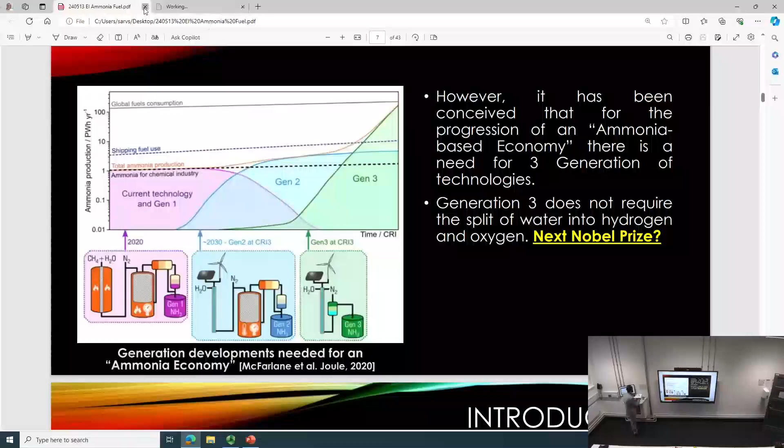I would say carbon neutral wine. Hope it tastes good. Carbon neutral, that's the most important bit. I was going to propose it and then drink it now, but I don't think that we have enough. We've got some plastic tumblers. Yes, anyone for it? Just a little bit. No, we'll let you enjoy it. You probably want to chill it. Thank you very much.